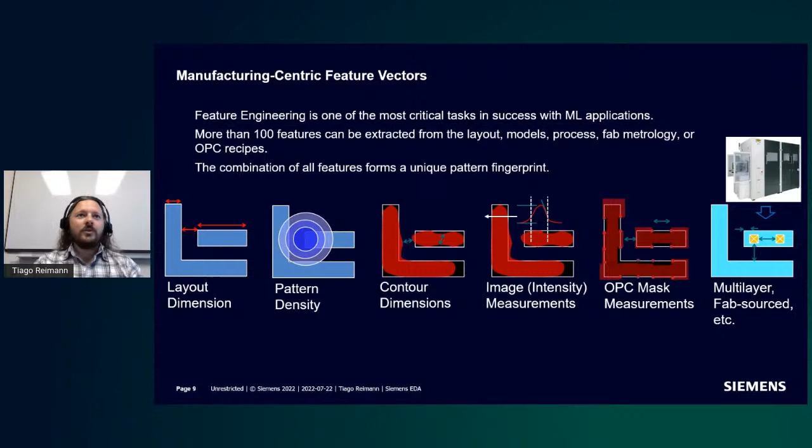We had more than 100 features that could be used that are based on layout, models, process, fab metrology, and the OPC recipes. And that, of course, is in the case where you're on the fab side and you do have the OPC recipes. For the design side of the product, they usually don't have access. So we use all those features to form a unique pattern fingerprint.

So let's say you chose all your features, then you take the layout, you extract those features for all the points of interest in this layout, and you define a fingerprint. So even different layouts or patterns may generate the same fingerprint or very close fingerprint, and then you say it's a match. Those two patterns that you're seeing, they should have the same behavior in terms of fabrication.

And then, of course, what can you do with patterns that have the same fingerprint? You have to understand, is that a good pattern, a bad pattern, or it's a pattern that you can ignore because it's not relevant to the data or to what you're trying to model. So the proposal of SONR was exactly to use that fingerprint and build models that make more sense on the manufacturing side than just layout pattern matching.

So you can see that this is just an example of how things can be, that we have an initial pattern and a very similar one with maybe the only difference being the distance between those two polygons in the center. And then you may have another pattern that doesn't look the same. The only similarity is that it has the two horizontal patterns, but everything around is different.

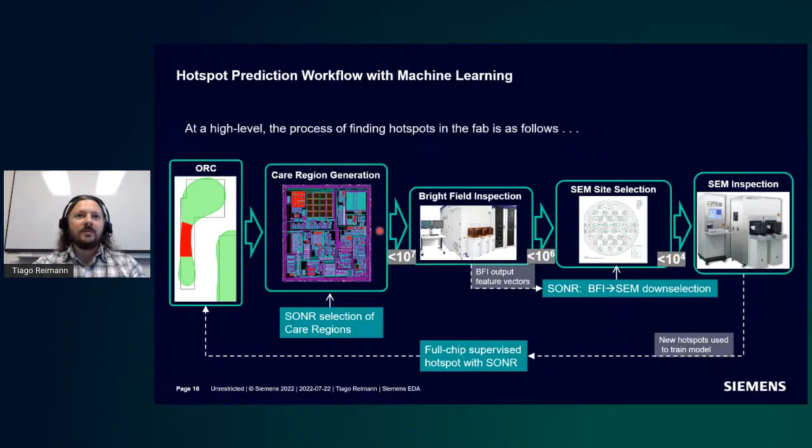So you can use SONR to do this down selection to tell which things are similar, so you don't have to look at those things twice. You just look at one of them, and then you can get to your 10,000 locations coming from tens of millions. So yeah, this is again back in the day.

So the goal is to classify using similar features as used in machine learning OPC. From the product layout, you extract the features that are based on the layout, the shapes, the process, metrology data that you may have from the fab, etc. You build a model, and then you can do a hotspot ranking and see what is a defect for sure, things that are similar, and things that are not defects.

So coming now to what we have today and what is the infrastructure behind this. If you remember all the questions in the beginning, large amount of data is a problem, right? So one of the steps you see here is that we have to have a database that is able to handle this kind of data. So we do have design information that is either from test chips or products.

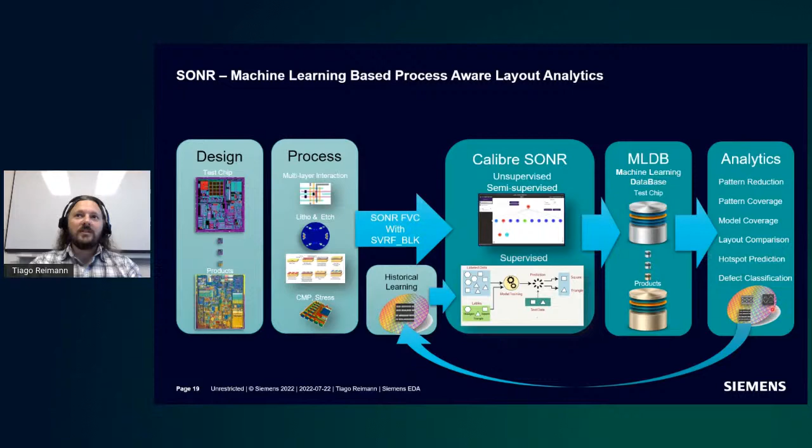You can predict hotspots, so you can take action, depending on which stage you are, to change the layout or to change your OPC. And then you can also classify the defects to understand where they are coming from, and maybe solve that on the process side as well, or on your design side. And you can have a feedback loop and improve your model, and get better and better on the analytics side.

So back again to feature engineering, we have many sources of features. And of course, this is very critical, because the way you choose your features defines what you can classify or not. If you don't have enough information about a pattern, you won't be able to tell if it's different than another pattern. So we do have many ways of getting features. They may come from the design level, from measurement, from the simulation side, and from the pattern level.

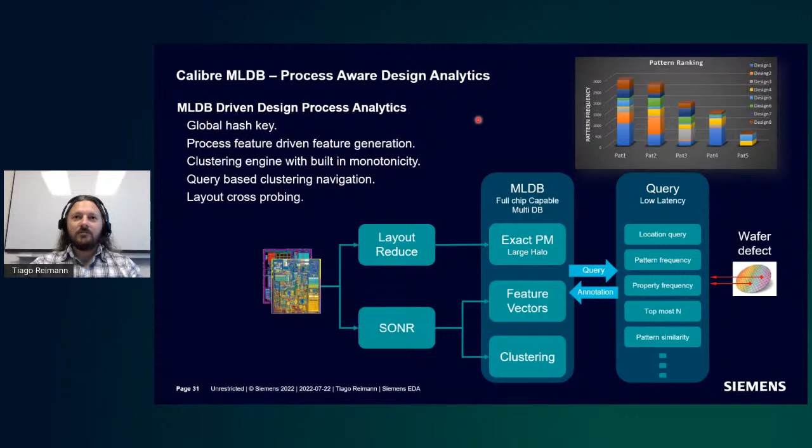And of course, you can have that data not only from results of SONR, but directly on feature vectors or with pattern matching as well. So we have a way of also doing pattern matching to generate this database based on exact pattern matching.

And this can be important for analysis when you want to see the surroundings of the region, and many applications can use location queries to understand what is wrong about those patterns and what are the issues that can be tackled in other ways.

Again, going back to the example of comparing chips, if you have a test chip, you can run SONR on it, find all the clustering, and then when you run your production chip through the same SONR model, you can see that you have new clusters, and those new clusters will be the new patterns, and you can visualize that and use that to improve your pattern coverage and improve your method.

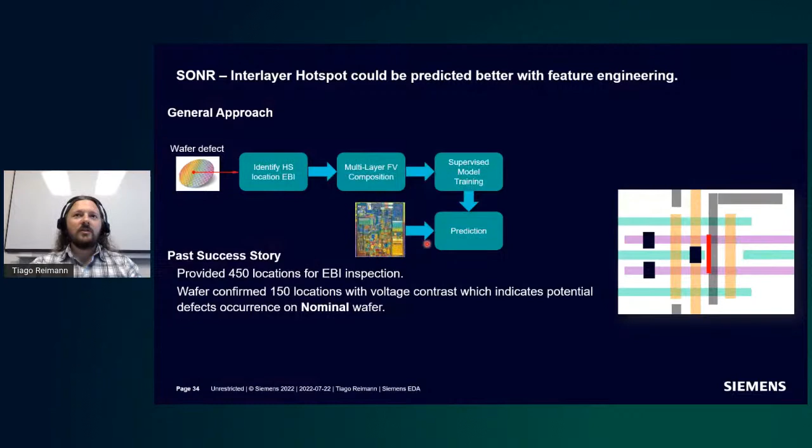As I mentioned before, there are also problems that require multiple layers, because the problem itself is a result of interaction between multiple layers. So SONR is also capable of doing that. You can build a model based also on the information the fab has. And we also have success stories for this kind of application, where you do a prediction using the supervised trained model, and you'll be able to predict other locations that suffer the same problems.

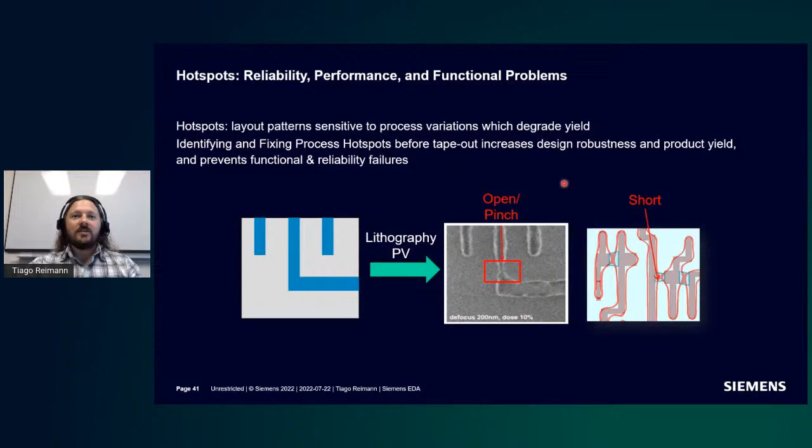For the lithography, I'll jump over this because they're just trying to find where the issues are. If you have a pinch in this case, or a bridge here on the right that is a short, we want to be able to find those problems and classify them correctly. So it's the same process. You define your data, you train your model, and then you predict and see how good your prediction is for a different layout.

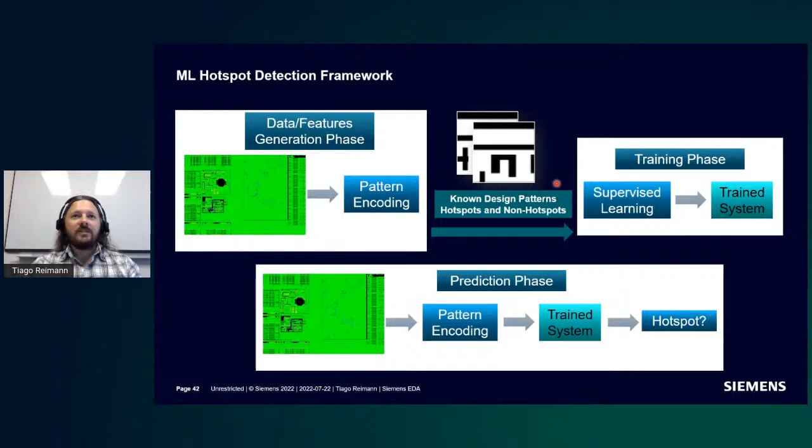One of the biggest problems is that what you know about hotspots is way less than non-hotspots. So you don't know many hotspots. And there are many patterns that are very hard to classify because they look very similar to each other, but one is a hotspot and another one is not.

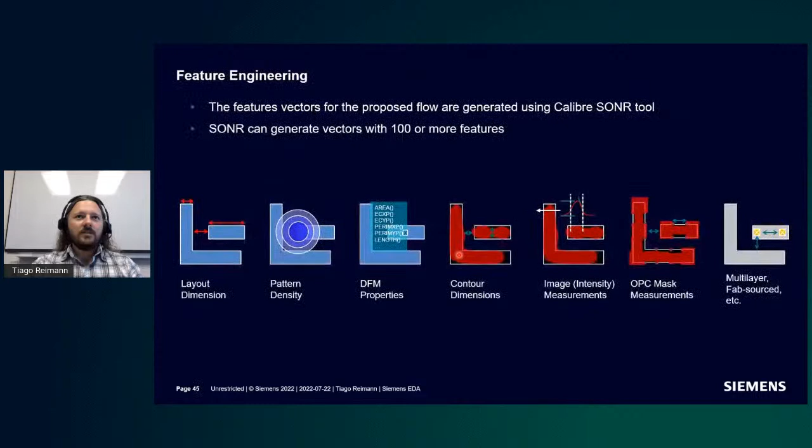So the first solution proposed is to downsample all this non-hotspot data to reduce the data imbalance between hotspot and non-hotspot, and also do feature engineering to find which of the non-hotspots are very similar to hotspots, so we can include them in the data set and make sure we are not excluding them from model training. So again, feature engineering is critical. In this case, it just says they are using more than 100 features, without specifying which features are being used. You can maybe check the paper.

Then 4 approaches are used. One is just with random sampling. That is what you do at first when you don't have much information. Approach 2 is with random sampling plus the hard to classify patterns and the non-hotspots that are far from hotspots. And then doing the clustering of non-hotspots to down select the non-hotspots. And also approach 4 includes the hard to classify patterns.

Doing with clusters, then you select one representative of each cluster for those that are non-hotspots, so you make sure that you're selecting all non-hotspots, at least one from each cluster, and your data is representative of the whole set. And you can also use clustering to find the ones that are hard to classify and include them on the data set for training.

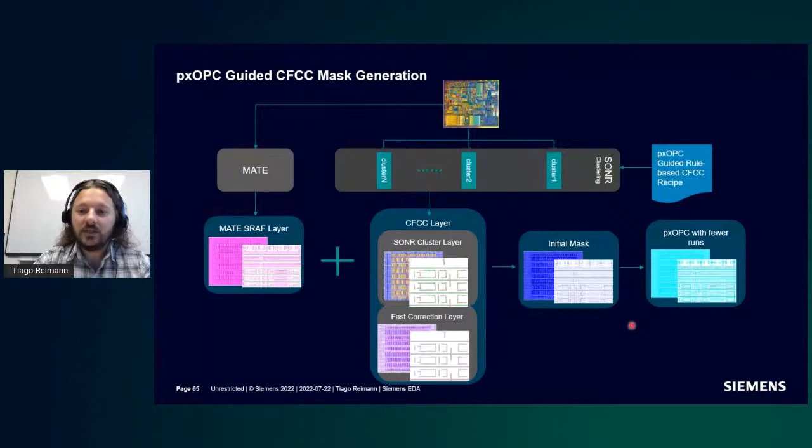So yeah, here's what I was describing. You're combining some tools with SONR clustering, and with that you can achieve an initial mask, and then you run pxOPC with fewer iterations. I believe the number is not reported here, but in the example used it was 60% faster than running inverse lithography directly.

So this is one interesting example of what I mentioned in the beginning. Sometimes you actually have more points of interest than polygons, because you have many points of interest for each polygon. That is usually the case when you're doing anything related to OPC, because the idea of OPC is to move fragments of those edges. Each fragment then becomes a point of interest, and you want to be able to classify those fragments correctly.

So in this case, you're going to have many points of interest in one single polygon on your target layer. You need to compute the feature vectors many times, depending on the location along the edge of this polygon, and then you do the classification for each one of those points. So in this case, it was using this fragment-based point of interest.

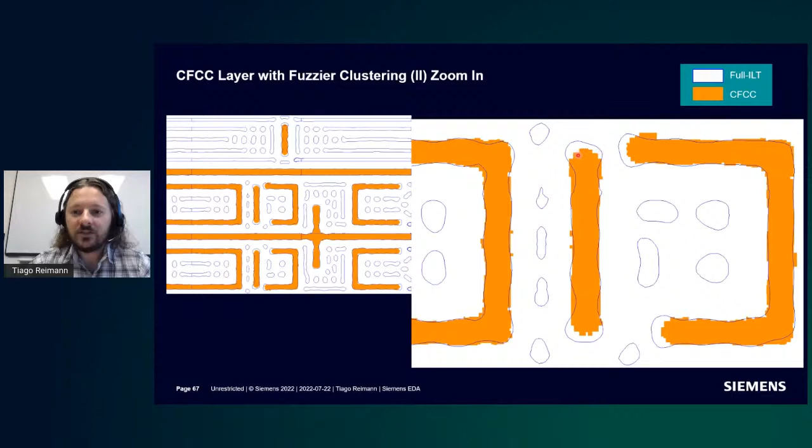Here it's comparing some results with fuzzier clustering. You can see that what is predicted here is not so close to what inverse lithography gives as a result. But with more strict clustering, the CFCC, the proposed solution, can get much closer to the edge of inverse lithography. And that is the goal, right? We want to get fast and as close as possible to ILT, so ILT can have fewer iterations.

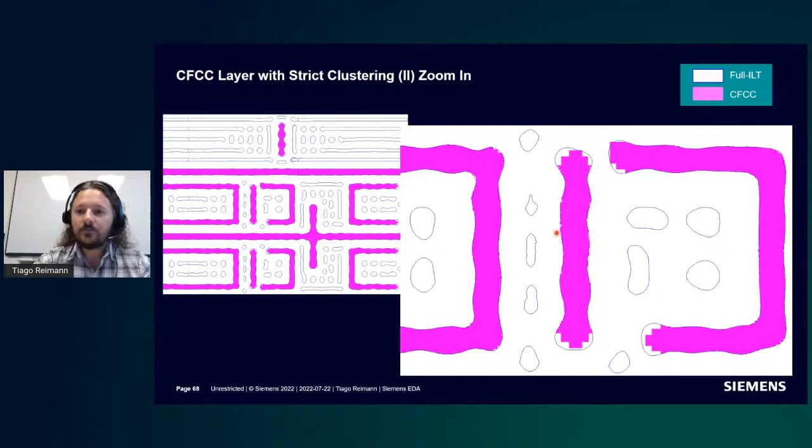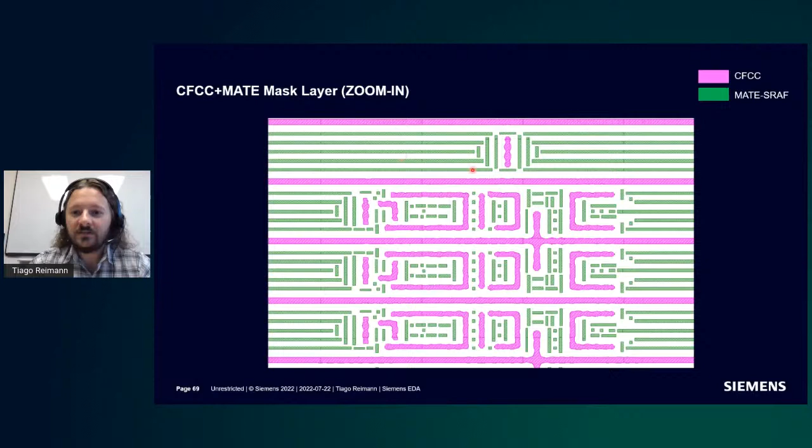So here's the input. Remember that we are using the input from the clustering based on the layout, and then adding the sub-resolution assist features, SRAFs, around, not using pxOPC, but using a regular tool that is rule-based and therefore much faster. So with this layout, then we do

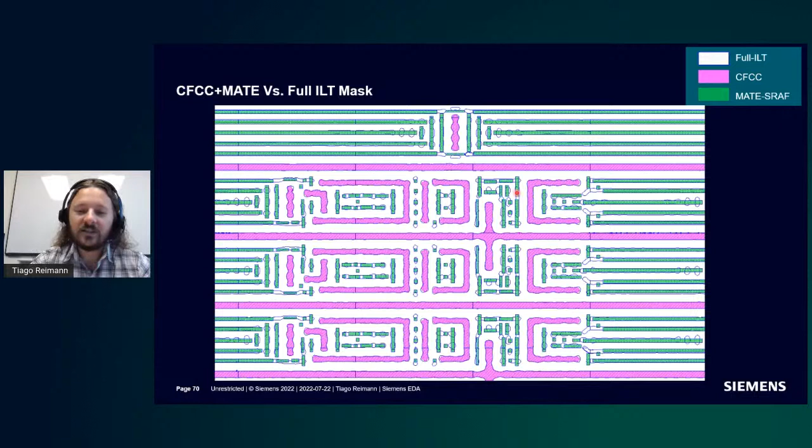some ILT iterations, and based on those results, you can compare doing only the ILT solution with the result with CFCC, and they are close enough. It's not going to be perfectly close, that is understood, but they are very close. And as I mentioned, runtime was actually 60% faster.

So this is the result after running the ILT solution on the modified inputs that were created using SONR clustering. And you can see this is a very smooth ILT solution.

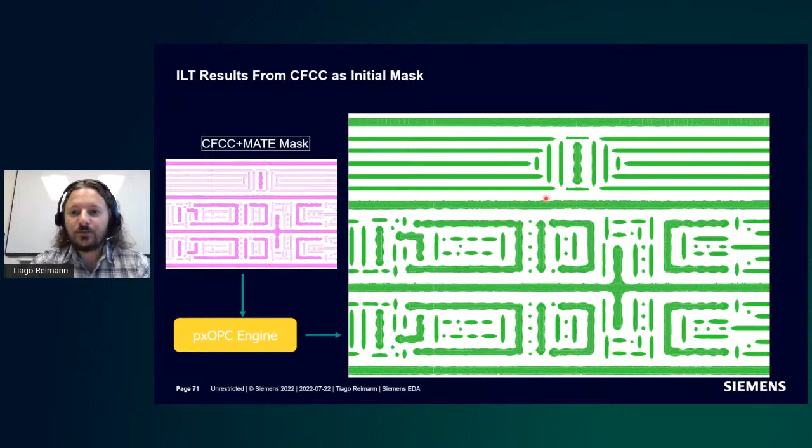They need those full-chip runs to finish within 12 hours at most, let's say, depending on the size and the complexity of what you're doing. So you probably noticed that I've mentioned many times how runtime and handling these large layouts is important, because we are operating at the advanced nodes, so everything is large. You cannot escape from that.

So that was just the extra example. We can go over the questions, I think.